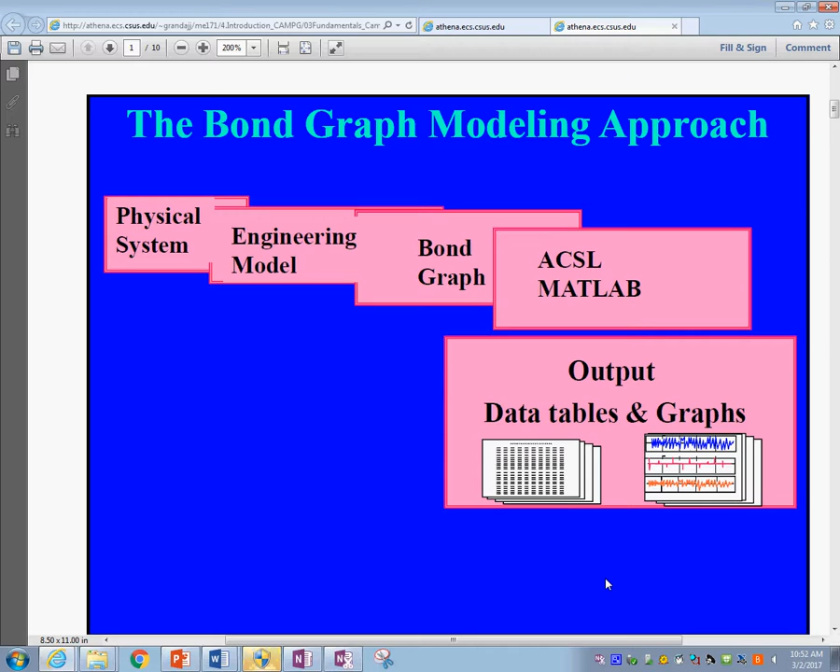So in here we have the steps that we normally use to model something. I took this approach from Norman Nise, who is an author of a Control Systems book, and summarized the steps of doing a model. One is determination of a physical system and the specifications, the requirements. Then draw a functional block diagram.

Before you do this functional block diagram, you have to have the equations of motion of the system. Otherwise, you cannot do it, because block diagrams represent equations. You want to transform the system into some sort of a schematic and then use this to obtain a mathematical block diagram that has the representation of the equations.

So the first one was the functional block diagram, what parts are connected. But the second one is really a block diagram from the equations of motion. On number 5, reduce the block diagram to a closed loop system, and then of course you do the analysis.

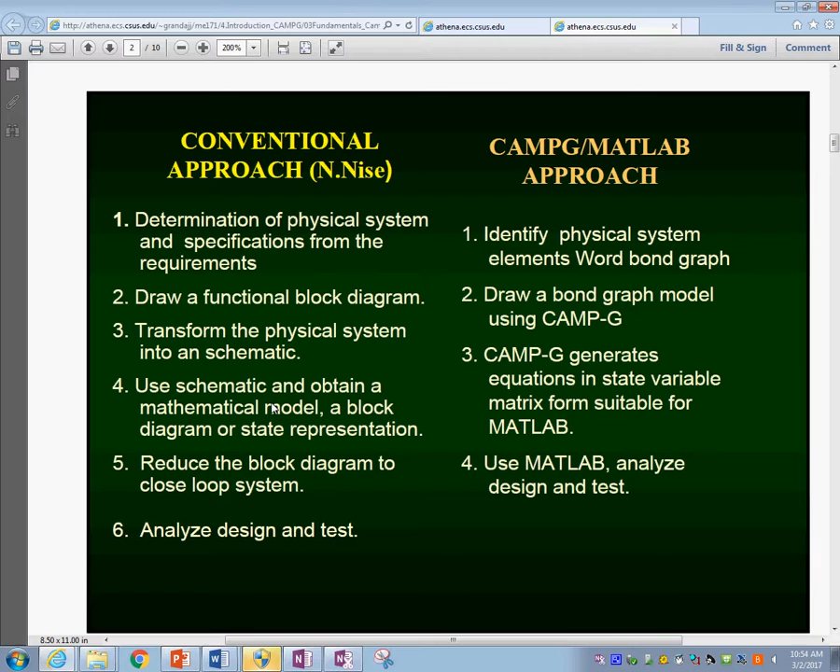And then run CAMP-G to set it up in such a way that we get MATLAB input files, and then just use MATLAB to do the simulation. That's the idea. So here we have some very basic principles.

On the left, we have the differential equations that control the dynamics of the circuit and the corresponding second-order differential equation. The one on the right shows us the differential equation of a mechanical system. If you compare it to the electrical system, the derivation of the equation is different. In one case, we use Kirchhoff's laws, and in the other, we use Newton's laws. Nevertheless, both systems produce differential equations of second order.

From those equations, you could transform them into first order and get the state space form, or you could directly describe these equations to Simulink using double integration, and then you get the result. Or like I said, you reduce them to first order like you see over here. This is the circuit here, and this is the mechanical system.

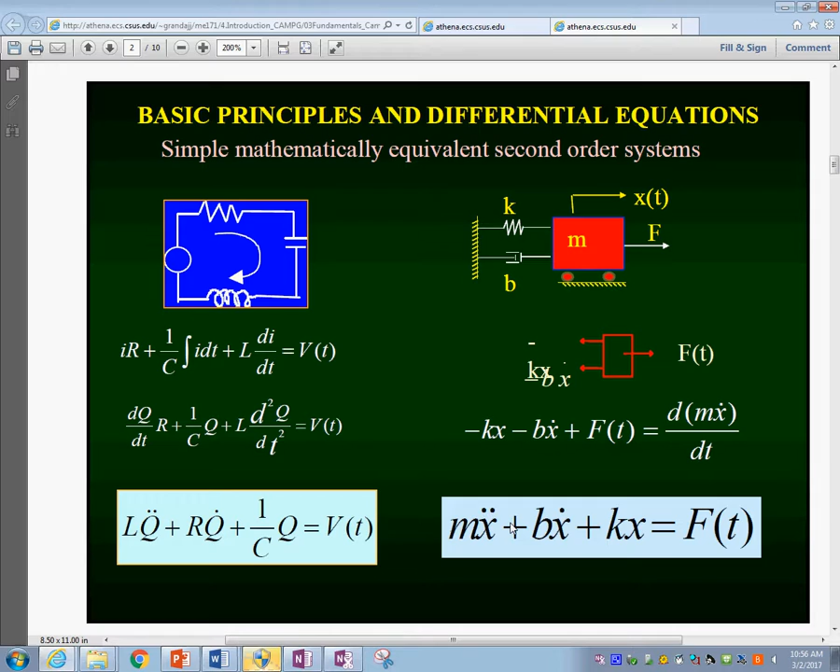The point of showing you this is that the circuit on the left hand side of this picture has the same format of the differential equation as the one on the right. Both of them are in two different energy domains, and therefore the equations are going to be different. But that's as far as they're different. The form of the equations is the same.

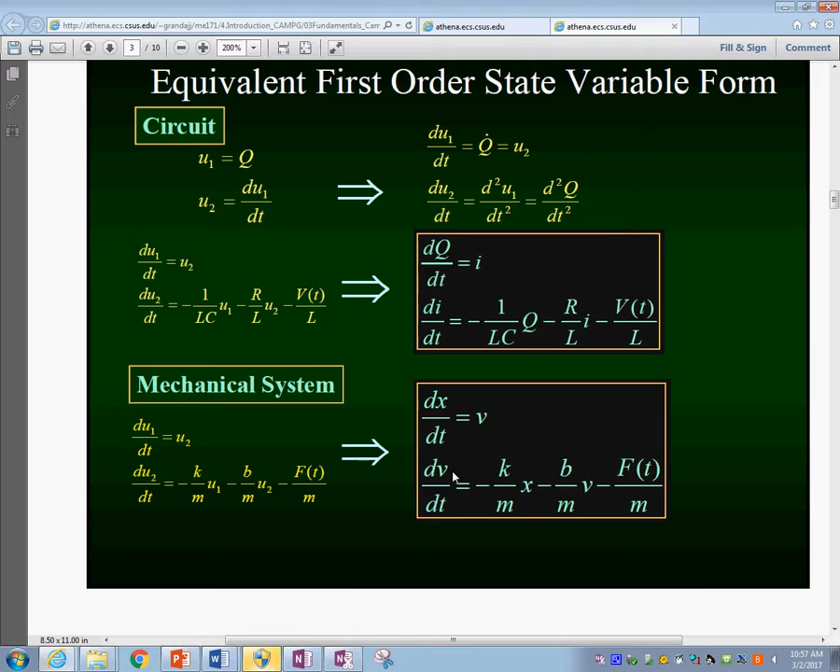And it shows also here, if we transform them into two first order equations, you can see that the state variables here are Q and I, and in the second one you have X and V, and both of those are equivalent systems to the second order differential equation.

Now, what CAMP-G does is it has the ability to help you enter these bond graph models into the computer. This bond graph model represents each one of the elements over here. This I element represents the inductor, the C element represents the capacitor, the R element represents the resistor.

And the same way on the right hand side. Before we go to the right hand side, notice that there's a common current that is a common variable to all three of those elements. On the right hand side, the velocity is common to all three. But when you say current on the left and velocity on the right, those two variables are in the same family of variables.

And so in the mechanical system, we end up with the same bond graph, but we did not mix up the two. They were derived on their own. It so happens that the way they are connected and the elements they have coincide, and therefore the bond graph models look the same, but the units and the meaning of each of the variables are different.

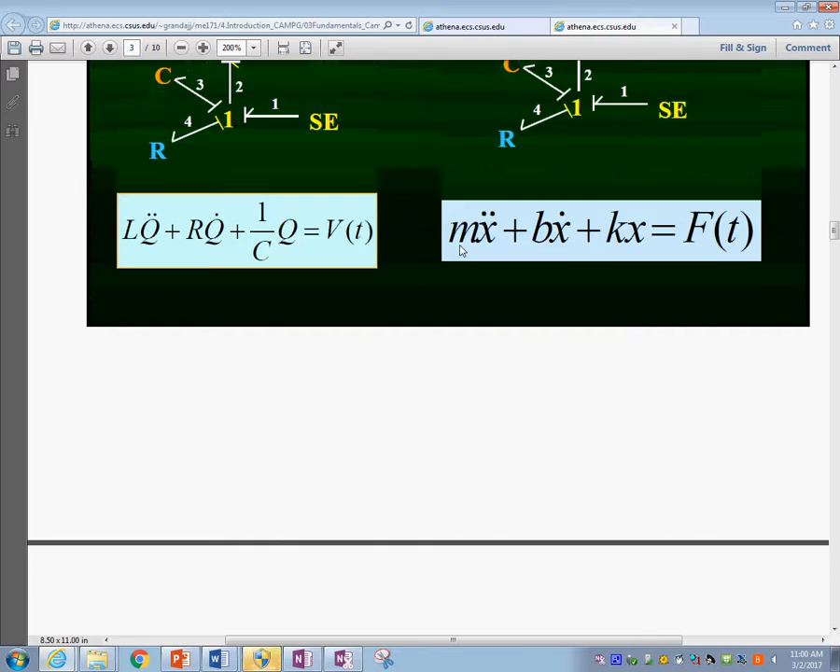And then you see that vector where you see X and V. That's called the state variable vector. And then you have a vector of inputs, so that's where you have F. If we go back over here, for this example, you see what are the necessary variables that we need to describe the system.

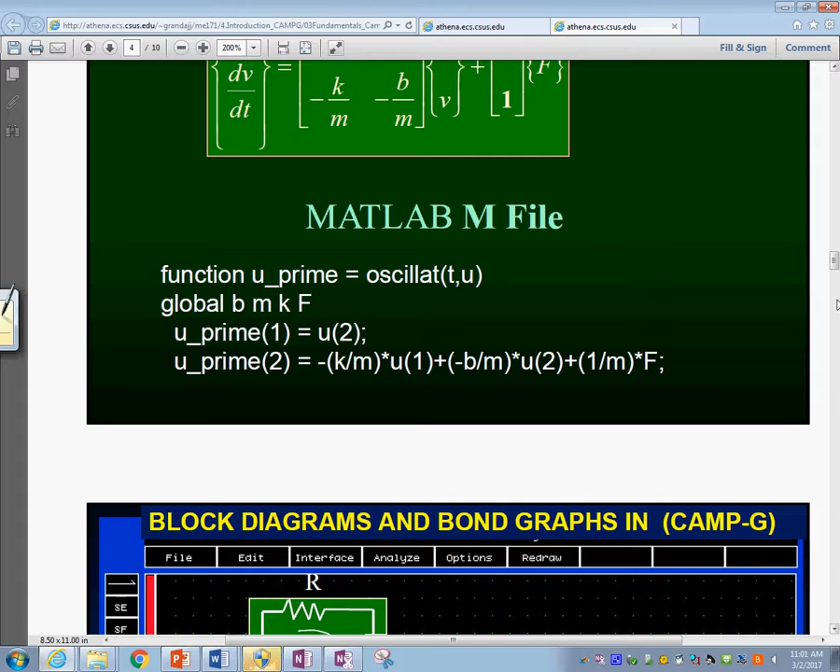Obviously, to describe the status of the entire system, we would need to find the position of the mass. That's very obvious. But as it's moving, do we need to know anything else? And the answer is yes. We also need to get the velocity here. So you have a situation where you will determine the velocity of this, or the current on this other side.

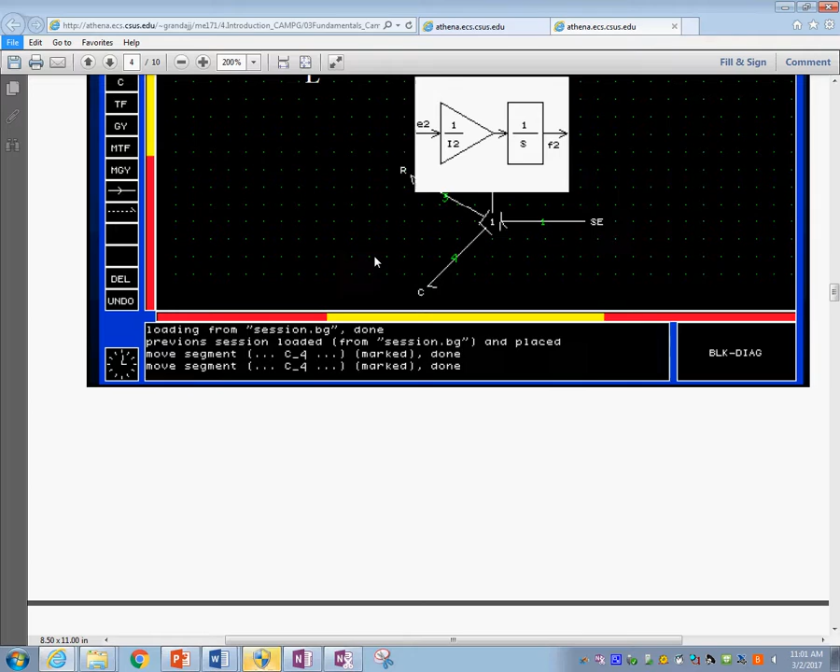But here you can enter that bond graph model into CAMP-G, which is what you see here. And once you put it into CAMP-G, you could examine the equivalent block diagram if you like, or you just produce the necessary bond graph model input for MATLAB. And that's what's happening here. This is what we entered into CAMP-G. Whether it is for the mechanical or the electrical system, it does the same way.

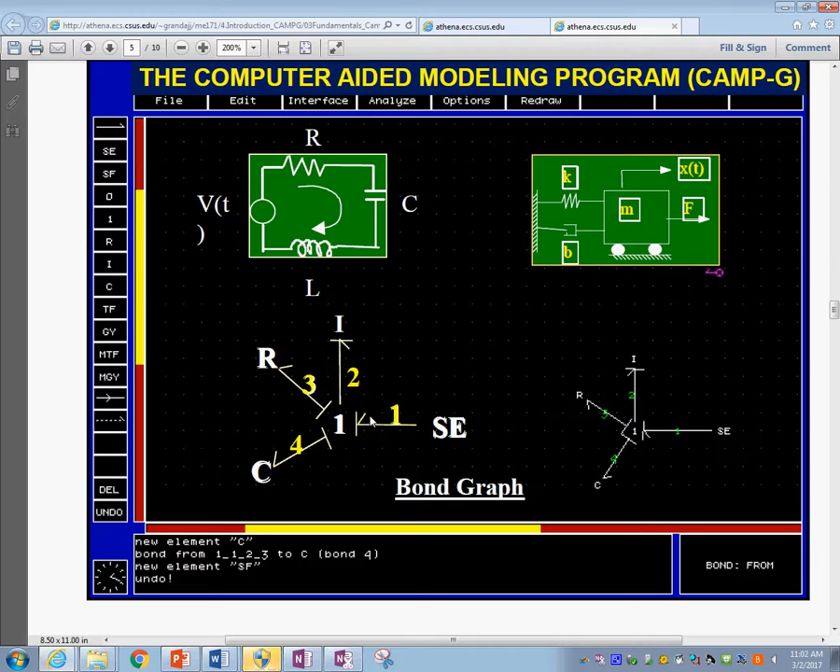Okay, so at this point it's important to point out: what have we achieved? Where do we want to go with this? First, we generate a schematic model of real life, and then we create the bond graph model. And then once we're here, the CAMP-G software is going to do those three things for us. Actually, it's more than that, but this is what we need at this time. It will automatically derive the state space equations. It will do the symbolic system matrices that those equations require, and will perform the simulation using these M files in MATLAB.

Okay? And then once the model is generated, you have to enter the physical parameters, the control blocks, and everything. Once you put that into the MATLAB M files, it will deliver it for the CAMPGSYM file, which stands for CAMP-G symbolic file. So in here you can do it in the frequency domain or you can do it in the time domain. And then you'll get the numerical results. That's the idea.

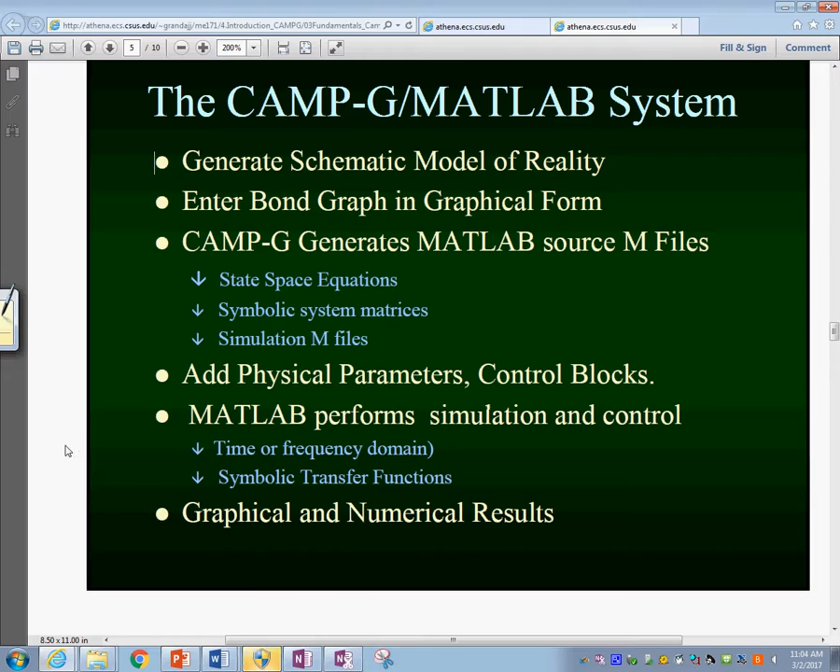So, in brief, you'll have the generation of the bond graph model, then automatically generate the equations, and then you'll be ready to do your simulation. Okay? This is, in words, what we have reduced to: create a bond graph model, produce the MATLAB M source file automatically, and now we can produce the transfer functions for each output chosen. And finally, model the physical and control system. Combining block diagrams, you could use Simulink.

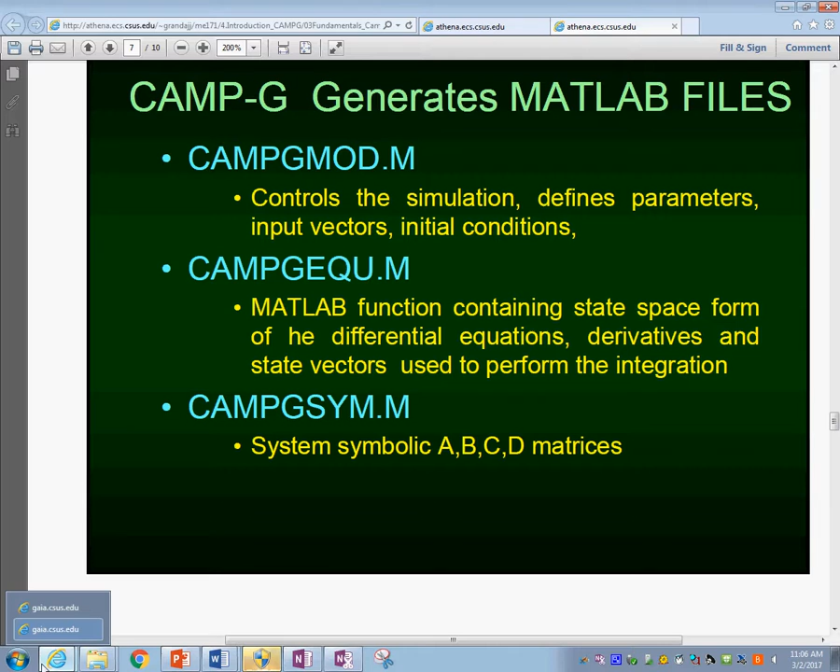CAMP-G generates these files: the mod file, which is the model file, the equations file, which is the differential equations file, and then the CAMPGSYM file, which is the symbolic file. Also, you have a CAMPG num file, which is just to work with numbers, not with symbols. This is a view of how the first file, the CAMPGMOD file, looks. And then this is the input for MATLAB, for the example that we saw a moment ago. Here you have a description of the physical parameters, the inputs, the initial conditions, the time control, the solutions of the equations, and of course some plots. So that's, in a nutshell, from beginning to end, producing and setting up computer models.

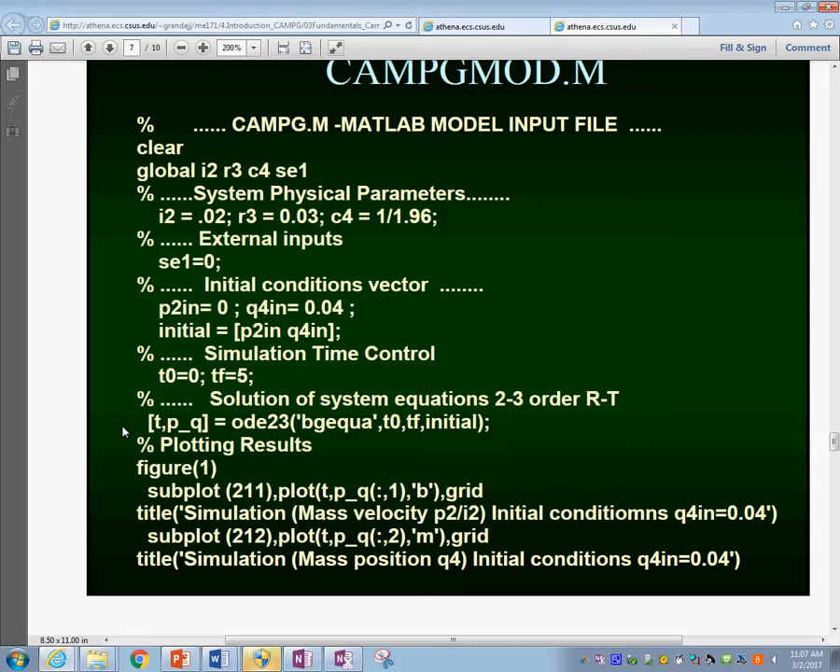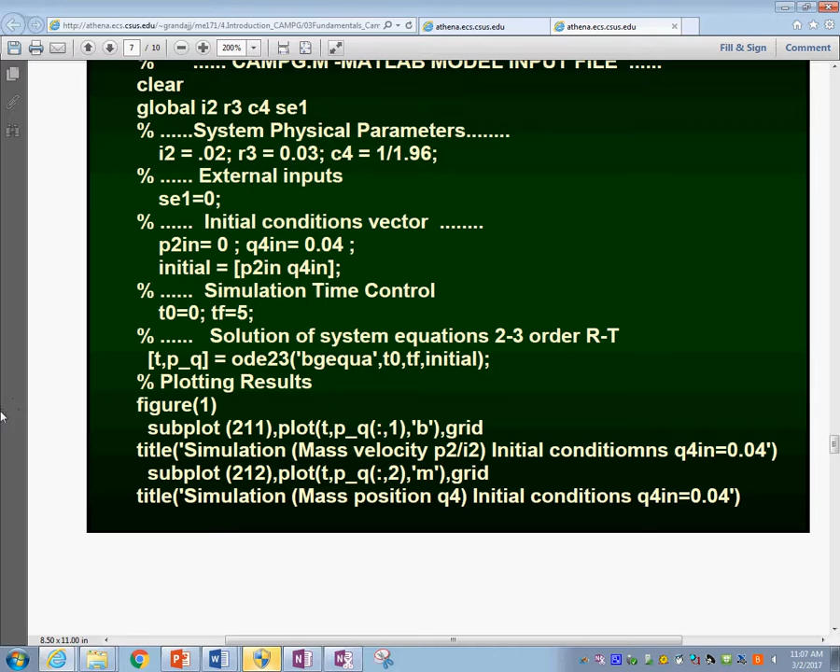Okay, this is the description of the physical parameters here, these ones right there. The external inputs. And then you have the solution of the equations: this statement here calls the solver of the differential equations. And then of course it's a matter of plotting what you see.